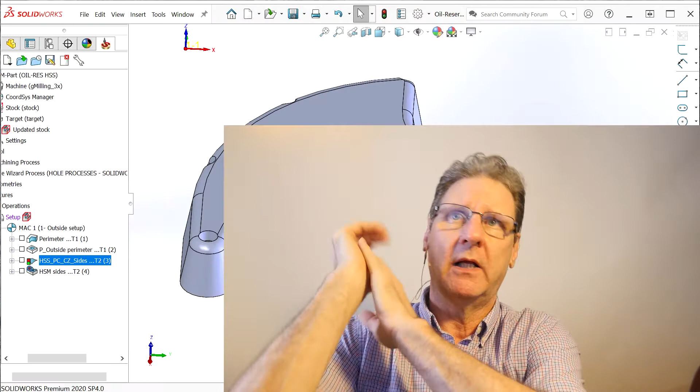But let's go up and look at our SolidWorks. This is that oil tank thing I made for a Harley design I'm trying to do, a Sportster design. What I did is I changed the part from when we last used it in another 3D episode. I put a 10-degree draft on it. Because of that, I had to reduce this fillet all the way around from 1/2 inch to 1/4 inch. Then the holes plunge and more fun stuff.

I had this show half taped and SolidCAM went twang and stuff wasn't acting the same. So I got everything ready and hopefully I'll show you and make my points.

Now, can I get away without any roughing, either HSR, high-speed roughing, or 3D iMachining? That would be $4,000 I could save, give or take.

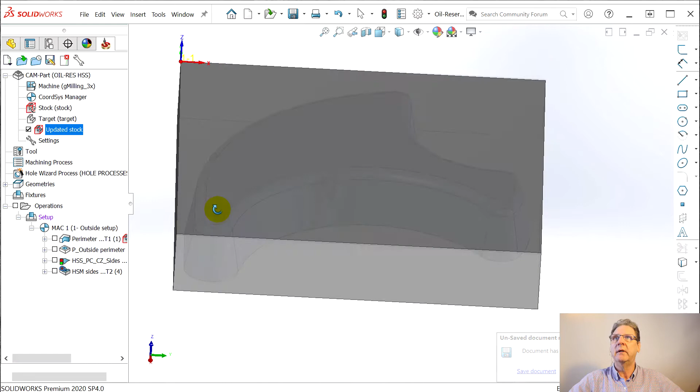So I said, well, this part, the stock is like this, right? 8.5 by 8.5 plate, 1.5 inches thick. So why machine all that extra aluminum, right? Why make chips? So I said, well, the first thing, let's just cut the perimeter out and leave the rest of the stock.

Then to face it, well, I want it pretty. So rather than just face, same thing, why face that whole thing? Let's define it as a pocket. So this outside perimeter, and there's a little trick here in that I use the outside perimeter and then, well, here, we can go look at it.

I was so put off by how complex things are until I use one of these complexities. And then I think, oh, everybody needs this. The geometry was just the outside perimeter, just a chain around the base of this thing, okay? But then the trick was modify geometry, all chains, each chain minus 0.3, and that's what pushed it out a little. That means it's going to nicely and cleanly deck off that whole plateau.

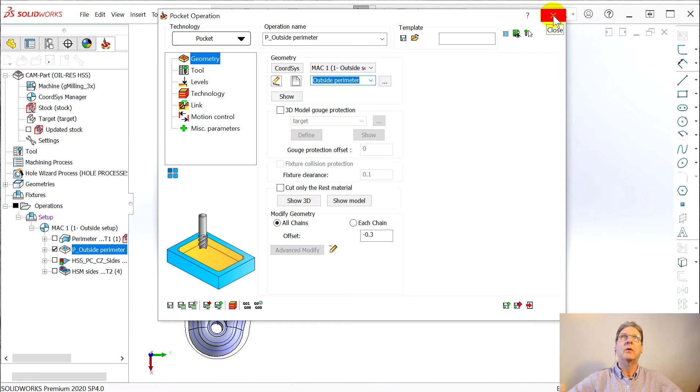Matter of fact, we can show you. Let's get out of this. And let's turn off the tool paths. Well, the angle here doesn't matter, does it?

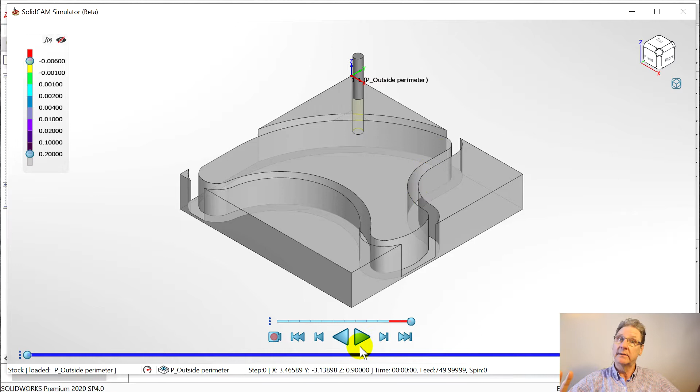Now, this is their great simulator. This is why you really got to love this thing. It's ready to go. Oh, by the way, I used 3/8 end mills instead of 1/4 inch for this. So 3/8 to do this perimeter, leave a nice big gap all the way around it. It's a tough operation, slotting. The fact that it breaks out here is actually a benefit.

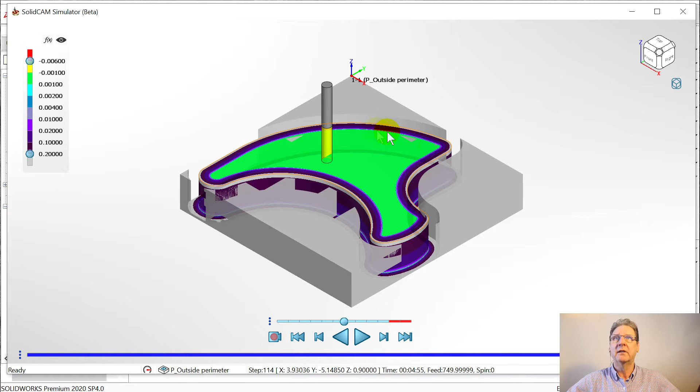Oh, it's super fast because I'm getting ready to do the other stuff. Let's make it a little better. I decided to go from the inside out. You could go from the outside in. That's all easy stuff. And then when you go here and do the compare, you see it's perfect, green, within 1/1000th of an inch, plus or minus 1/1000th.

So let's get this thing ready for the next time. So then I said, okay, high speeds, they're included in the base package, level and constant Z high-speed surfacing, HSS. So here I did it with high-speed surfacing. Matter of fact, while we're changing it, let's see high-speed surfacing sides.

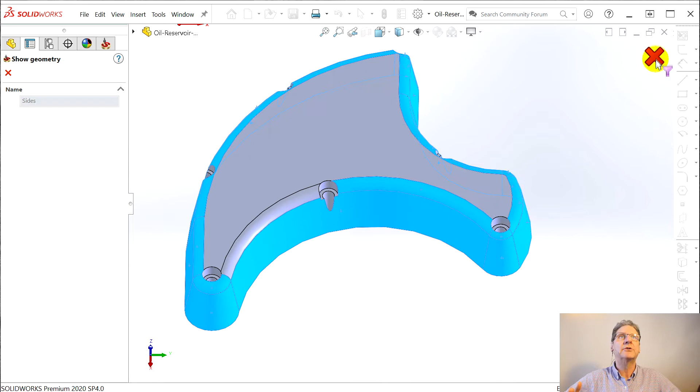The geometry, let's just show you. I just went and picked. Now, here was the trick, right? And this is where the thing got confused. I must have tweaked this. If you generate tool paths now with these holes, it'll do retracts at every hole. It gets all confused. So my trick was to just take the slider bar here, go up above that, the holes all disappear, then generate, and I'm not going to do this because, I don't know, things got tweaky on me.

Generate the tool paths now, right? So then it just goes right past where those holes were, does it perfect. This is why you want CAM that works inside SolidWorks, and not something you bring an IGES file into, then you're suffering with standalone Mastercam's CAD or standalone OneCNC or standalone BobCAD or standalone Visual Mill. That's why I'm looking at the 5 programs that work inside SolidWorks. You do the toolpaths, life is good.

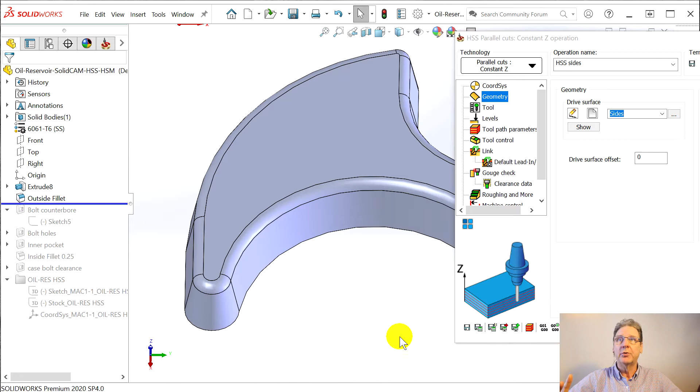I could even show them to you. They show up like that. Sorry about this long retract. Like I say, I got burned once. We're running out of time here. Then you can just go back and look at your holes. Come back here. Life is good.

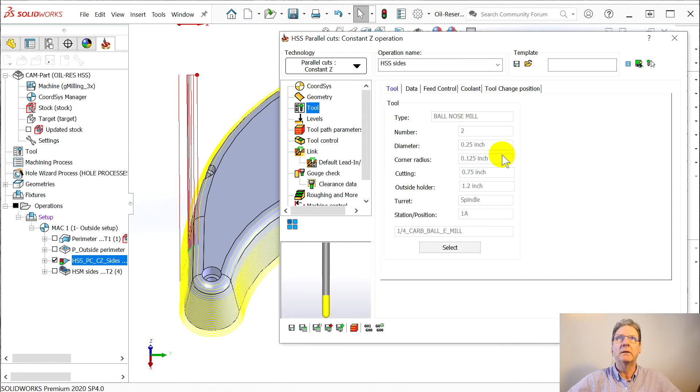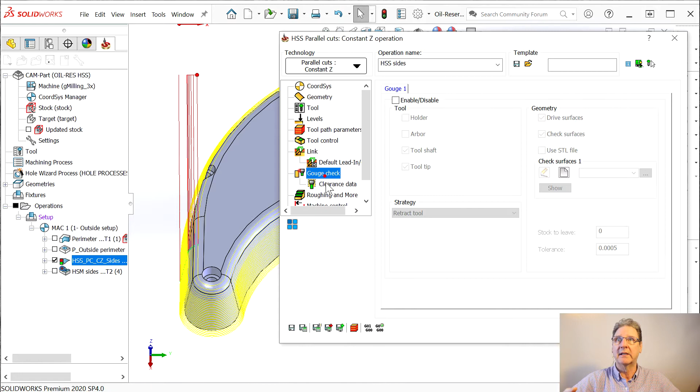Pretty much picking here, the tool, now it's a 1/4 inch ball nose end mill. Levels, all that's automatic. The parameters, I went down here and said, I want within 1/1000th of an inch. It was, I think, 2. So that's like a step over of 30 thousandths because of the ball intersecting the sides. Tool control, don't think I did anything here. Like I say, I'm not going to touch this because that's how I burned myself on the first 3 takes of this. I started the part just from scratch, just like any software. Just start over from the beginning, and now it's acting a little better.

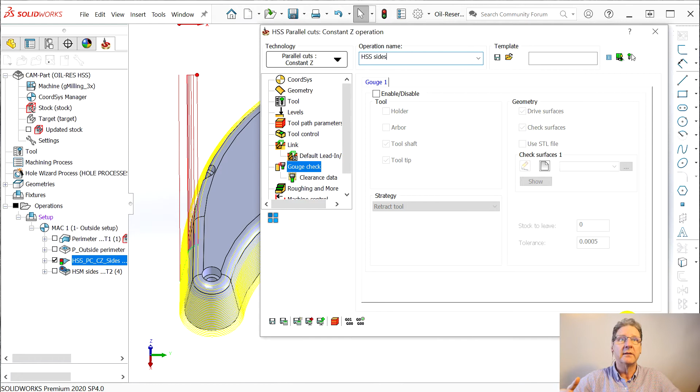So I'm going to close out of this. No. Do you want to exit? Yes, I do want to exit. I changed the name of it. That's what's going on. Let's see if it'll let me do that without clobbering anything. HSS space sides. Everything recording? Yeah, life's good. And now go save and exit. So I didn't touch the toolpaths.

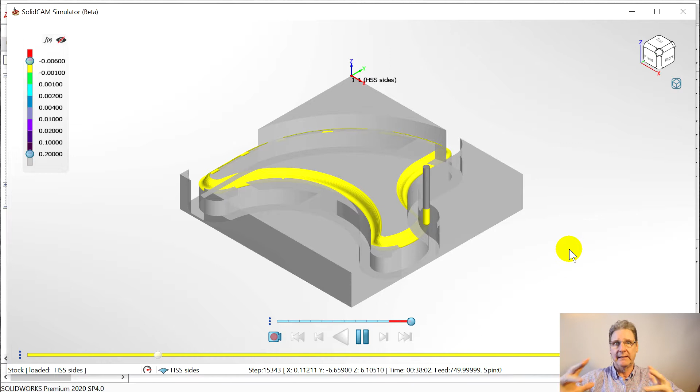Now I want to show you this great simulator. We've got it sped all the way up. I noticed down here is the machining time, right? So let's go here. I'm not sure it's right, to start from here instead of outside in, and I'm sure all that can be adjusted. I just wanted to kind of get a feel for the difference between HSS and HSM. And the difference is, in one, you select surfaces. HSM, you select a model. It's high-speed machining, but the M makes you think of a model.

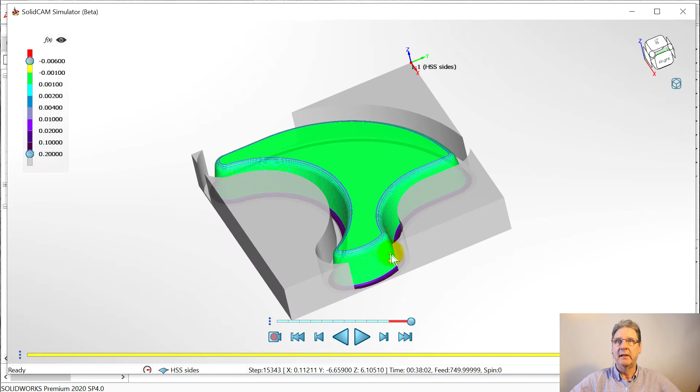Now watch. We'll go here. It's got to think. Now that's a pretty accurate surface, right? The sides, it's got a little chunkiness going on here. But that's amazing to me, right? Green everywhere, within 1/1000th of an inch of true. That's pretty impressive. That'll be a pretty beautiful part.

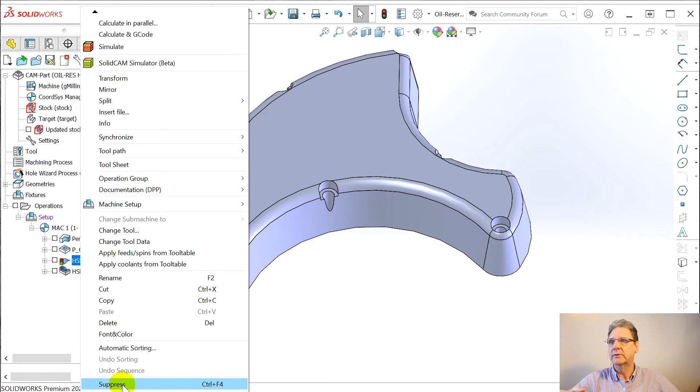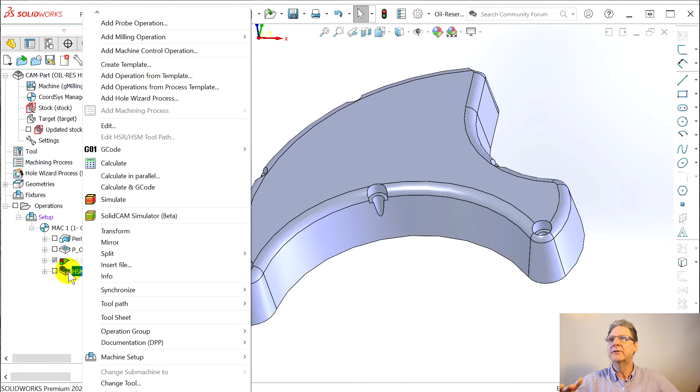So then I said, okay, now we got to suppress this because we don't want to do the same thing twice. So suppress that. Then I said, okay, let's use HSM, which is an extra cost module, but it has a lot of stuff in it. And so we're going to see if we can fix it now. You notice it's going in here. It's doing all this stuff. Plus, I think I should have mentioned, in HSS, I think I had a limit. No, we didn't. That's the nice thing about HSS. It just does the surfaces that you point to.

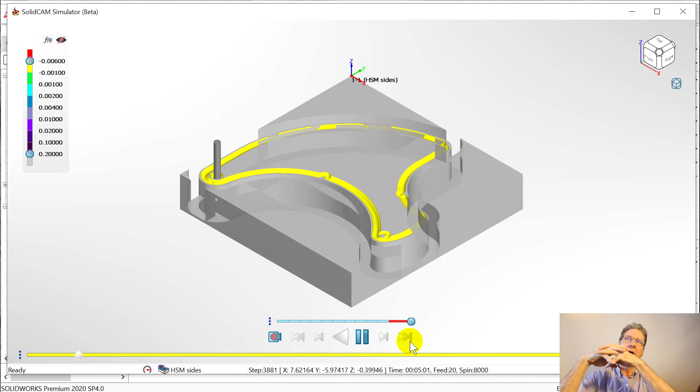HSM, I'm not too keen on. So let's do this before this thing crashes. It hasn't been that unstable. I shouldn't make out like this thing is flaky. I'm sure it's me, operator error, me doing stuff wrong. And you can see it's doing goofy stuff. It's drilling the holes. And I'm like, oh, well, I got to do the same trick. And you'll see the little wrinkle.

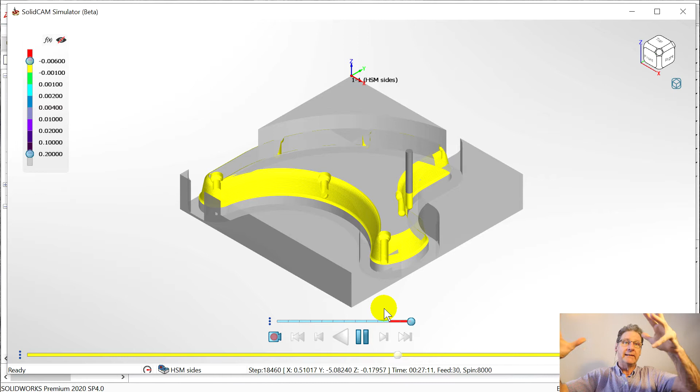You don't just move the bar and say recalculate, because it's taken the model when you made the geometry and said, pick the model. It doesn't really give you a choice. Pick the model. That's your geometry. Then it takes that and puts it in the SolidCAM data structure, right? So it's inside SolidCAM. So recalculating with that bar moved.

But watch this. This is one thing that kind of upset me. It didn't upset me. It's like, oh, this isn't as accurate, right? It's got some yellow, so it's a little gougey. Ignore these big gouges. It's got a little blue. It's got a little excess here, right?

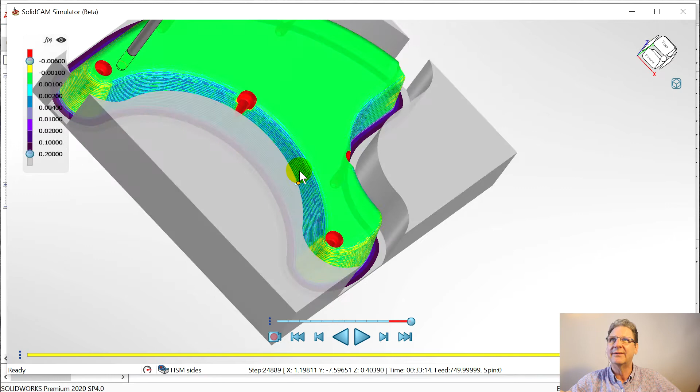Even though, hopefully I'll be able to prove it, double click on it, HSM sides, in passes, same deal. I said 1/1000th, and of course that's only shallow areas, but no. So hopefully that's one aspect.

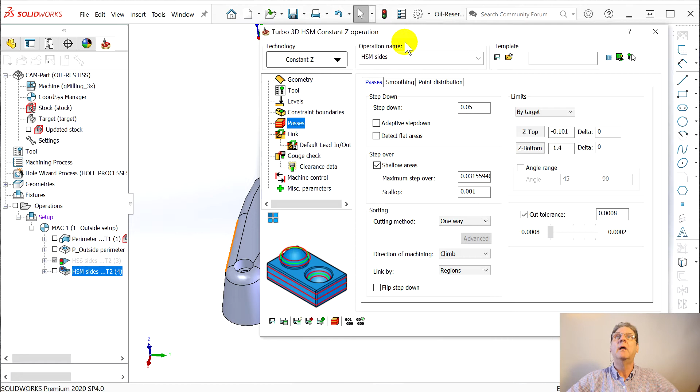Now, here's the thing. Okay, let's do what we did in that one show. It was so impressive with the surfaces. Doesn't work the same here. And I thought it was hosed. So you say recalculate the toolpaths. It exists, yeah, we know. Just do it over. And see, it puts the same goofy stuff in.

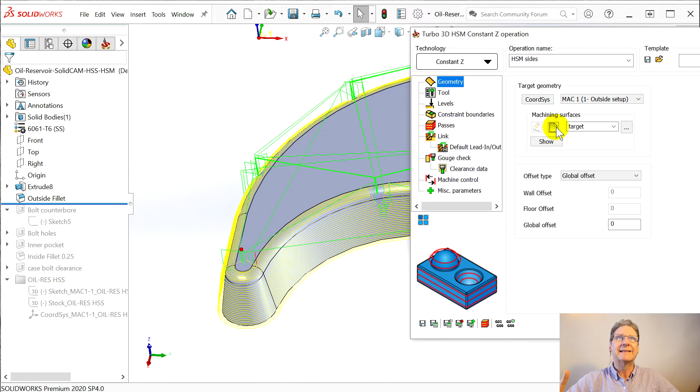So the trick is go to geometry, select, and it wants a model, so just click that. Now it's taken the model as it is with the bar moved up and no holes and stored that in the data structure owned by SolidCAM. It's got its own thing to remember this model somehow. So now you say, okay, and if I did things right, all of this crap here and going down inside, that should disappear. Let's see.

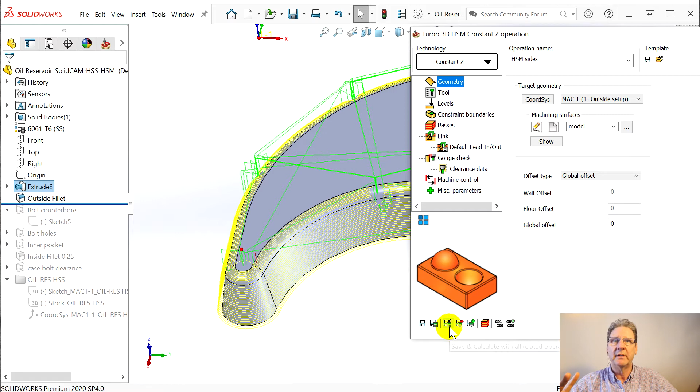Yes, same thing. So, okay, 10 minutes in, there's going to be a quick show, but maybe worthwhile. And this is the other thing I'm not so keen on. I kind of like surfaces. Carve this. I'll do this surface. I'll do that surface. I don't want to let it go nuts on a whole model. To me, that's like automatic feature recognition, all these things that they claim are great that never work.

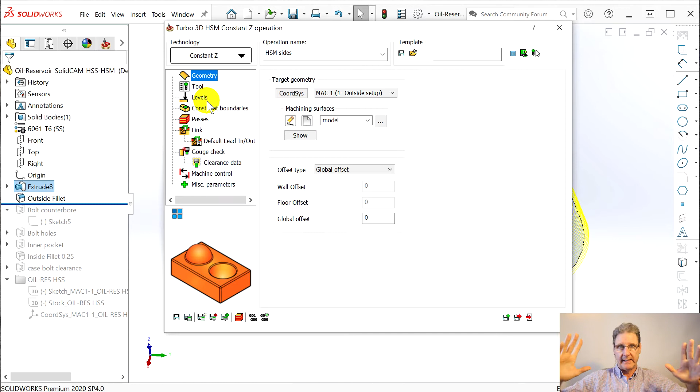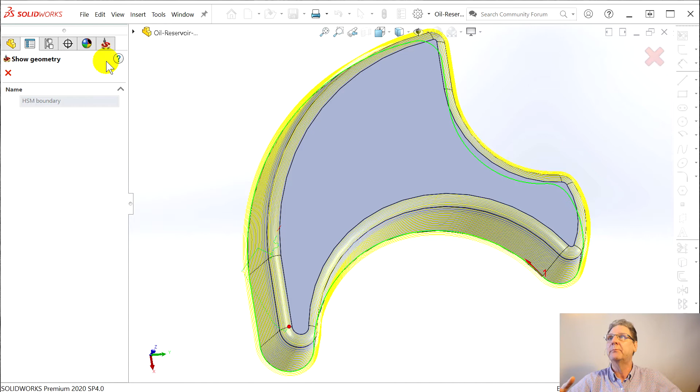So tool was same ball end mill. Levels, I had to do something. I had to make a boundary, show. Otherwise it'll start hogging the whole stock. It'll see the stock and start doing all that extra stock on the outside. So I gave it this perimeter, the same perimeter. And then you had to go down here and say external. I want to keep the tool external. I can't remember if it was external or center.

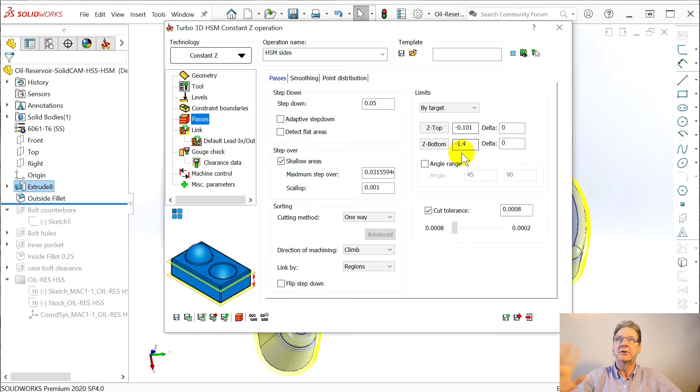Passes, to keep it from going and doing the top, right? Even though the top's been faced, it's not smart enough. I had to add 1/1000 of an inch here, saying, oh no, limit this thing so it doesn't climb up on the face surface and then start rastering that ball and ruin our beautiful pattern we did with the pocketing. So just 1/1000 of an inch. That eliminated all the tool paths here.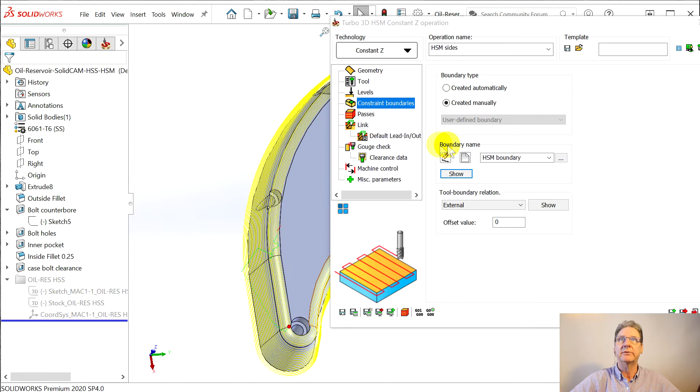Oh, by the way, now you can move back and recalculate. It'll calculate based on the model as we selected it up here in geometry, not the way it looks, unlike surfacing. Let me think, what did I want to show? We are going to go to passes. We're going to take this and say, go there. And now we should see it climb all over the surface of this thing. Think. Yeah. Okay, well, we don't want that.

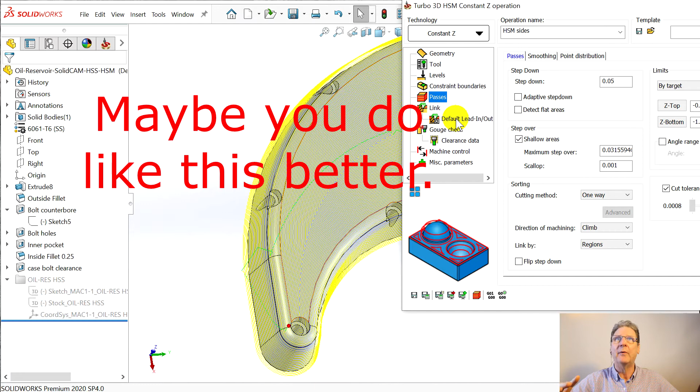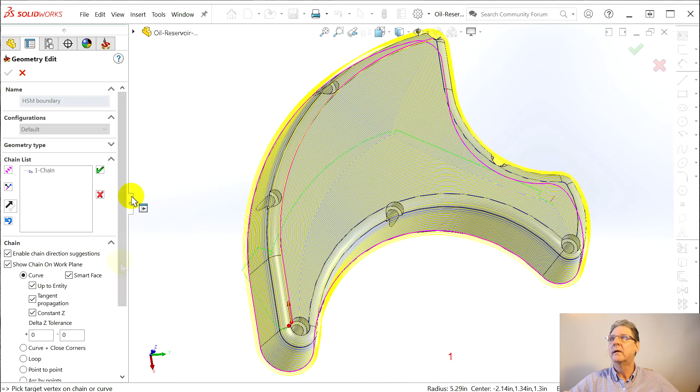So let's see. I don't think I did it that way the first time. Constraint boundaries. Edit the boundary. Okay, so it's got chains. It's got 1 chain. Let's see if we can put another chain here, right there. It's constant Z, tangent propagation. Do one more. It should go all the way around. Okay, we have issues. Sorry, folks.

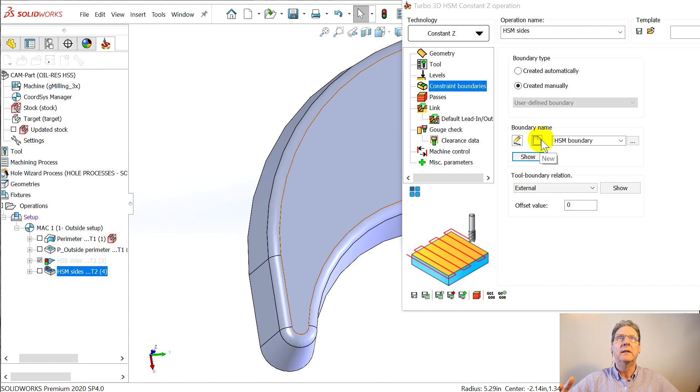First off, let's make things look the way we're trying to do. Next, let's hide those tool paths. Then let's go back to draining the swamp, the boundary, right? So we're going to try to make it between here and here so it stops doing all that. Not new. Let's edit the existing one. So there's the existing. Right? And it's 1 chain, but it looks like you can have multiples.

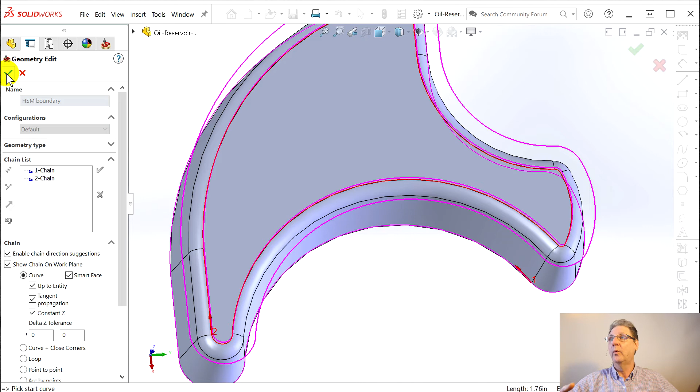Tangent propagation. I think if you do that, it's not smart enough. Now it is. I don't know why it needed that little extra push. Okay to accept. So that's kind of encouraging. I don't know if I should have started this one the same place I started this one. Well, let's hope for the best. Say, okay.

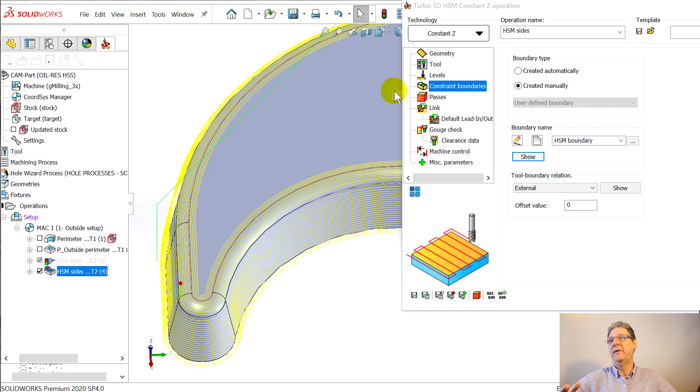Do a model, do a toolpath calculation, and see if it does it in between those boundaries. Yes, it actually climbs in a little. And that, I'm not sure is good. That might be a nice effect, right? To have that fillet actually climb over.

My buddy Dave, the guy who made that test part that's been tripping up all these CAM systems with automatic recognition, sent me a great email about it. It's like you're an artist. And all these toolpaths, the constant Z, the parallel, the radial, those are like the brushes you use to get a beautiful 3D surface. So he said, well, you got to have 3D, and it's kind of heart-stopping if you get full boat everything. It's kind of like Mastercam pricing. You'll be over $10,000. So that's why I'm exploring this. I assume you might be interested for these same reasons.

So what did I want to show you? Oh, okay. What do we got? 15 minutes. This will be a nice snazzy show.

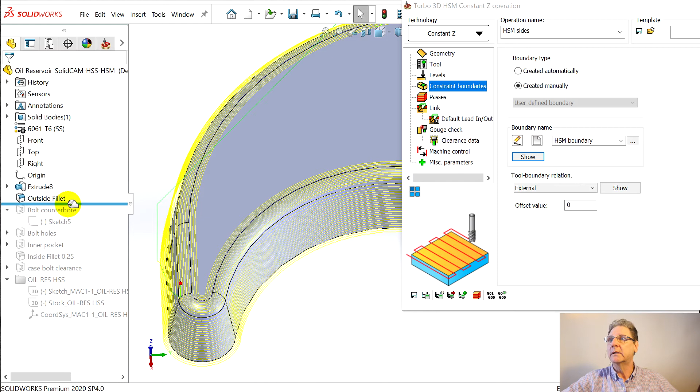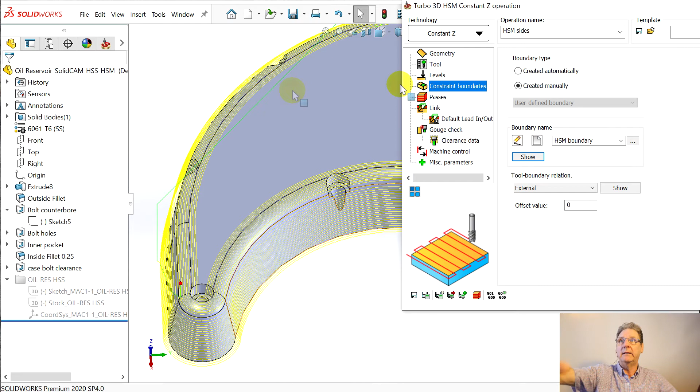Now, in the surfacing thing, at least when stuff is working right, like it did a few times, it would change the toolpaths and it would see these and it would affect the toolpaths. Here, because the model hasn't been reselected like this, yeah, we know it. See, because nothing's going to change. It's smart enough to say. So, it's nice. Now you know two ways. You can do another extra boundary curve, or you could do that 1,000th down limit and keep the tool from climbing around here.

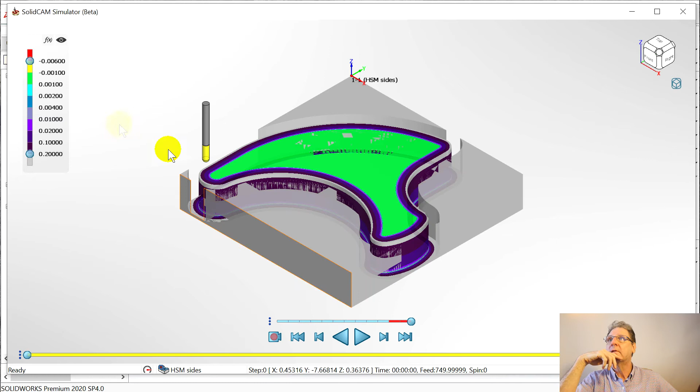Meanwhile, so we got a good name. Let's get out of this. And this simulator, boy, it's worth its weight in gold. I can't see doing any 3D without it. We've suppressed the other one, and so now let's do our beautiful simulator. Take the compare function off. Say it's full speed, so it's going to jump around. You can kind of get an idea.

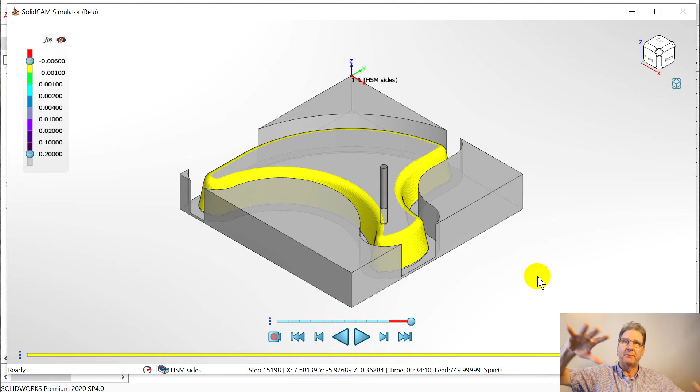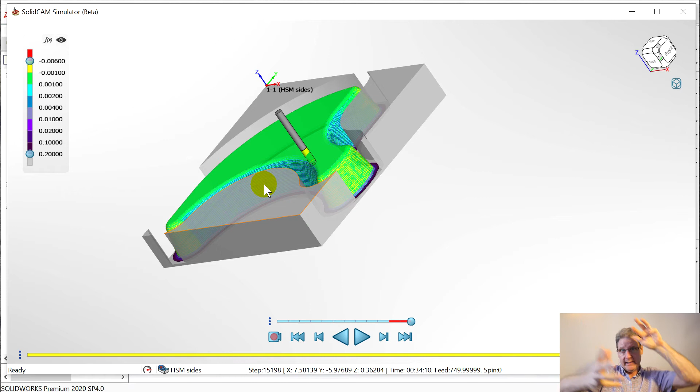Now let's see if we're still kind of unhappy with the accuracies. Yeah, see, not quite as good. Not quite as good. Might be a setting, right? But to me, HSS means you're selecting surfaces. Pick, pick, pick. HSM means you're selecting the model and trying to limit and constrain and rein things in so it doesn't go crazy. In this kind of case where there's so much extra stock that's going to be broken off, that would be kind of crazy.

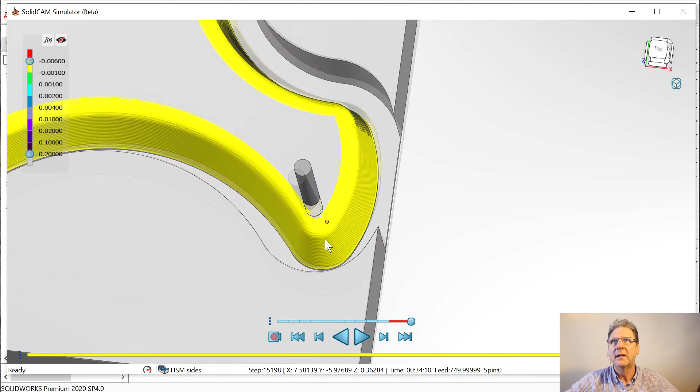So we can turn off compare. We can get out of here. It's interesting. It did this. See, the simulator is worth its weight in gold. The Mastercam and BobCAD simulator, I'm sorry. I don't know. I'm spoiled using this. That's why I'm trying to figure out if I can save a little money on the added modules. Do I need any of them? Do I need all of them? So what else did I want to show you?

A lot. Obviously then, these holes are all broken out because I did the slant and that. So we're not going to go through and do the rest of the part. We're not going to go do the bottom of the part. Similar principles, right? HSM, HSS.

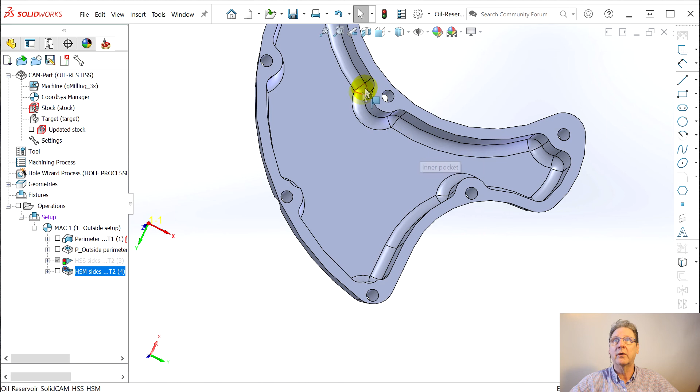As a matter of fact, the way this is designed, my design intent was to take a 1/2 inch end mill and you can just run it around here, centered on this or on the edge of the end mill on that, a ball nose 1/2 inch, or here, this is a 1/4 inch radius, and it comes out perfect. I've done it. Unfortunately, my Avid Benchtop Pro won't run a 1/2 inch end mill. The surface feet per minute at the tool gets too fast.